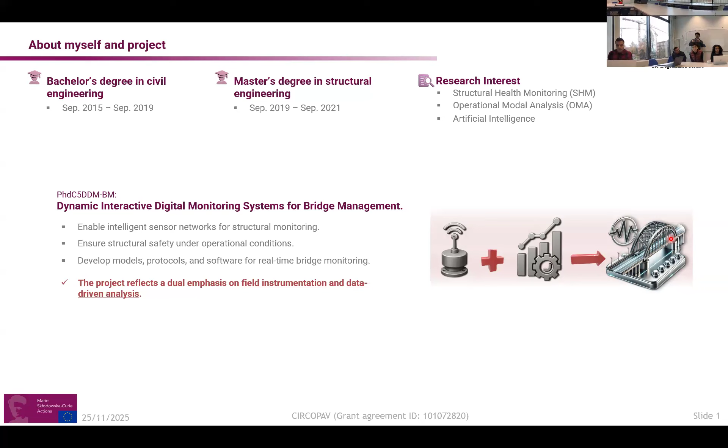Just a quick recap. I'm pretty sure most of you know, but we have two approaches for identification of modal parameters of the structure: EMA, experimental modal analysis, and OMA, operational modal analysis. The main difference is the input excitation to the structure.

For EMA, there is a controlled excitation that we impose on the structure, then we record the responses. But for OMA, we can monitor the structure under actual operation. That's the benefit—for bridge cases, we no longer need to cancel traffic. We can monitor it and assume the input as white noise.

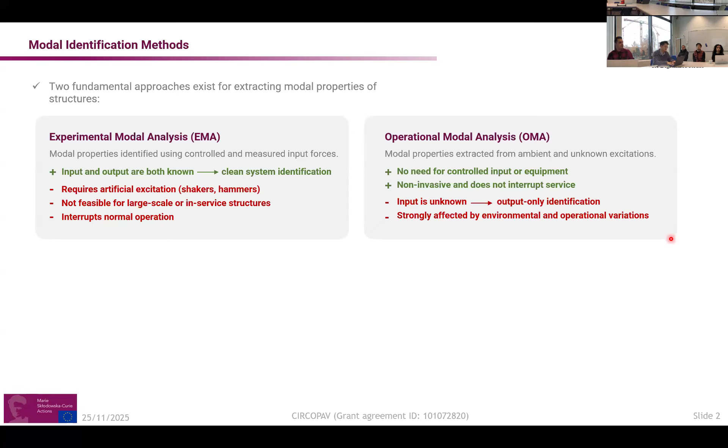We assume the input as random stochastic input forces. We assume three main points in OMA: the input excitation is white noise, the excitation and the structural response are uncorrelated so we can find the relation, and the structure doesn't change much during monitoring.

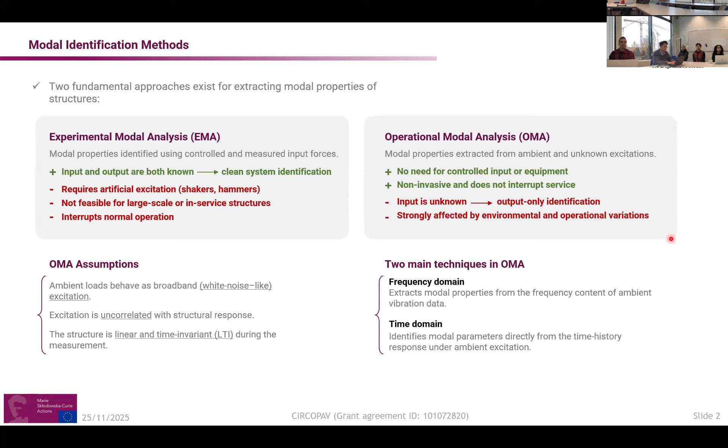There are two main approaches for OMA: frequency domain methodology, which analyzes the frequency content of the structural response, and time domain methodology, which analyzes the response in the time domain.

We have two main types of monitoring: wired and wireless. Each has its own pros and cons, but for our purpose, OMA, it's much better for us to use wireless because they are flexible and easy to install.

In cases where we need roving sensors or different setups, we can easily manage that. But there are some challenges with wireless systems.

One challenge is battery power—the energy source is very important for us. Then data transfer needs to be handled carefully. The third is data synchronization, because we're recording data wirelessly, so we need to be sure, for example, for mode shapes, that synchronization is certain.

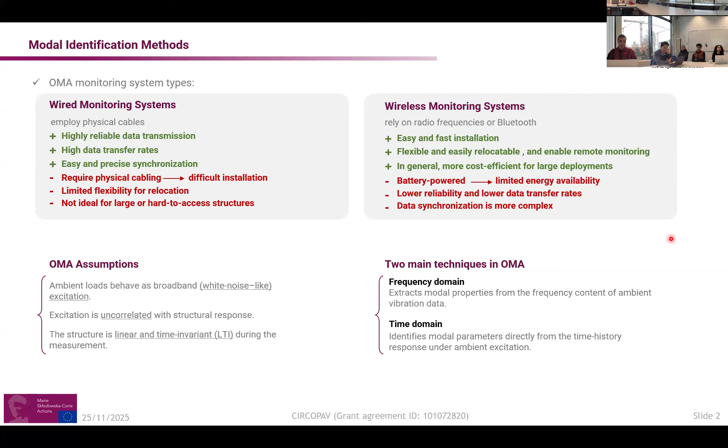Now let's go to the proposed framework. From the beginning of the project, I was cooperating with Fiama, the R&D department of Fiama, a factory located in Parma, Italy.

We have proposed a system consisting of three main components: wireless sensors, a router, and a cloud platform, all connected to each other.

There is a set of configurations that can be set by different users. The cloud is responsible for bridging between the router, which gets the data from the sensors, and sending the data to the users, and also receiving the configuration, which I will get into later. So these are the three main components.

These three pictures are just for the GUI that we have developed. We have developed a graphical user interface, web-based, so that we can connect the sensors with the users.

As you can see here, for example, each of the sensors has their address. This is just an example. We can set the sampling start time, the sampling interval between different recordings, the length of each recording, and the sampling frequency.

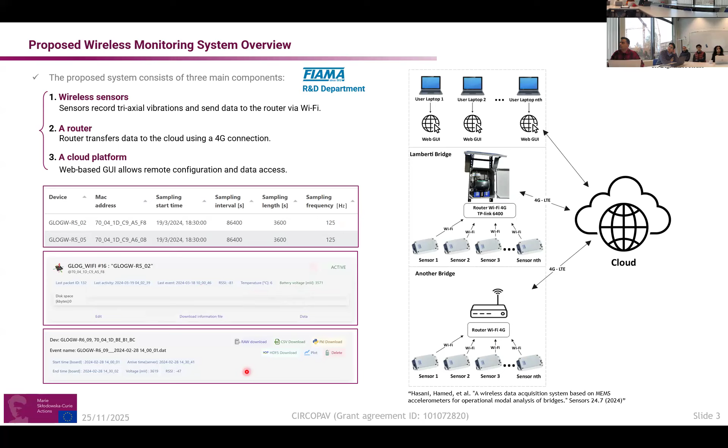The user can download the CSV file and plot them. This makes it very easy for the connection between the users and the sensors for sending configuration and receiving data. The important thing for this setup is we considered it cost-effective and power-efficient.

Now, about being power-efficient - we have an awakening workflow for the sensors, which are mostly in sleep mode unless we trigger them, and then they start recording by the specific configuration we set before. So they're mostly in sleep mode unless we trigger them via the cloud router command by the users, and also by the scheduled start time we specified before.

Then the system initializes - it initializes the sensors, the storage, the power internal module, and then loads the configuration defined for it, followed by synchronization. The timing is now set, data starts being acquired and recorded, then there is upload and finalization, and subsequently it goes back to sleep mode, which saves power.

Let's go specifically to the sensors. We use MEMS accelerometers, ADXL 355, due to its internal ADC converter rather than the 354. We use MEMS because of four important things - first, low power consumption.

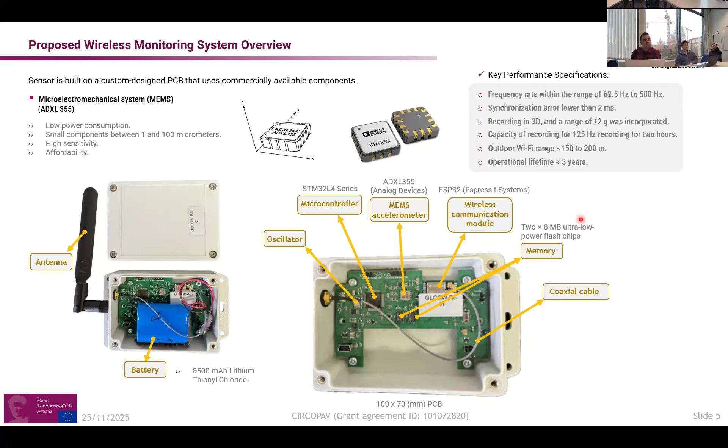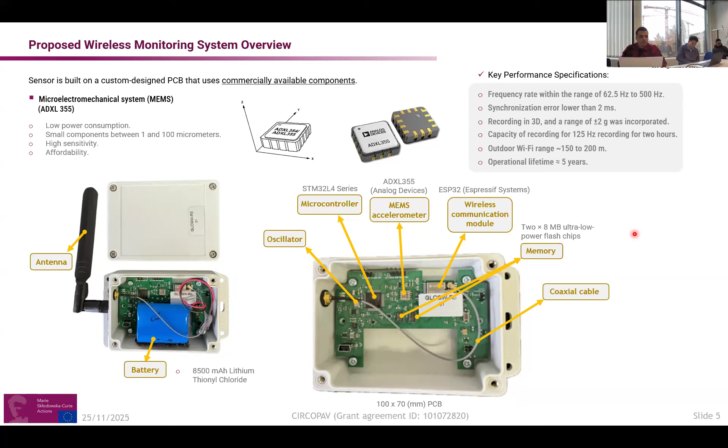Yes, they are in the project actually. So they are the contributors of the project, something like this.

Tests were done under ambient conditions, so no input excitation was actually imposed on the structure. It was just natural excitation.

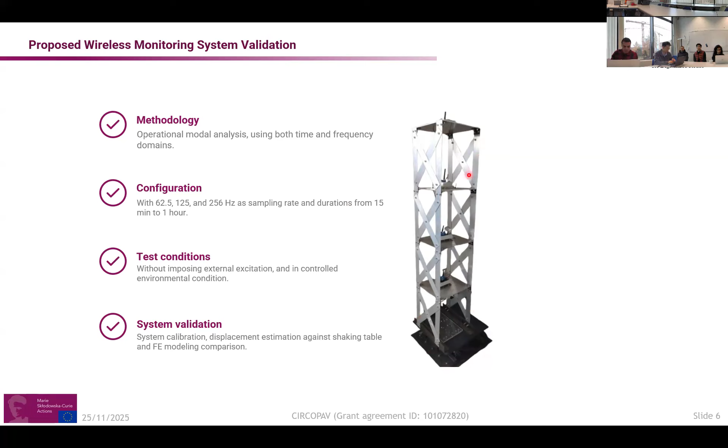We also used the shaking table, which would take too much time to explain, so I'll wrap it up quickly. This shaking table was used for validation of the precision of the sensors, and then we validated via the FE models also.

Now I'll show you the result of OMA. As you can see, we mounted one sensor in the middle of each of the floors, and with natural excitation, these are the results.

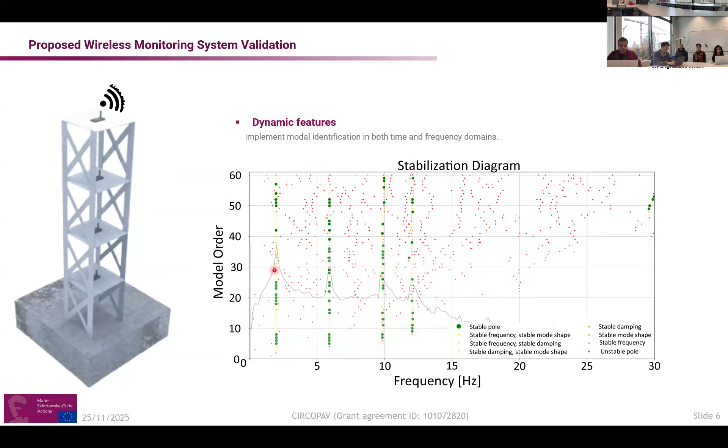As you can see, there's a combination of a stabilization diagram estimated via the time domain method, stochastic subspace identification, and also the PSD of the frequency domain decomposition.

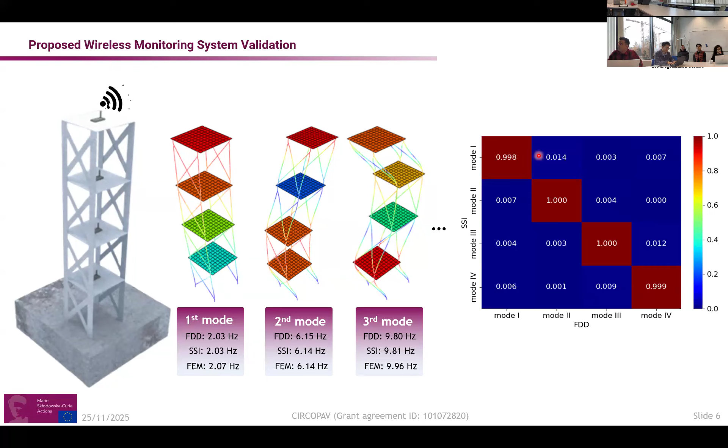We estimated the natural frequencies and validated the mode shapes with the FEM models. On the right side you can see the modal assurance criterion, a matrix showing the similarity between time and frequency domain. On the diagonal, values are close to each other, meaning there is cross-validation between the time and frequency domain methods.

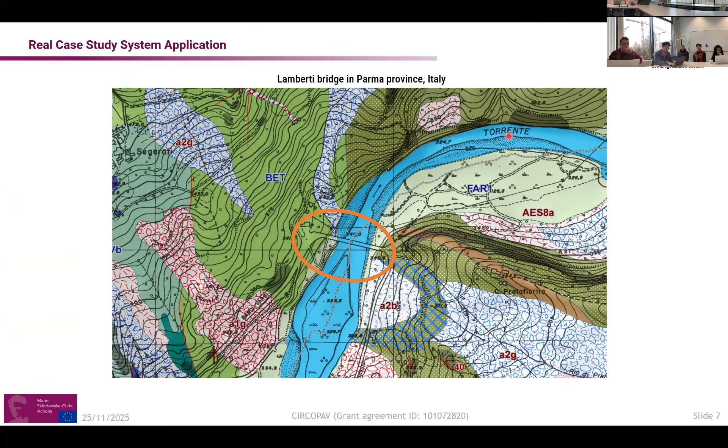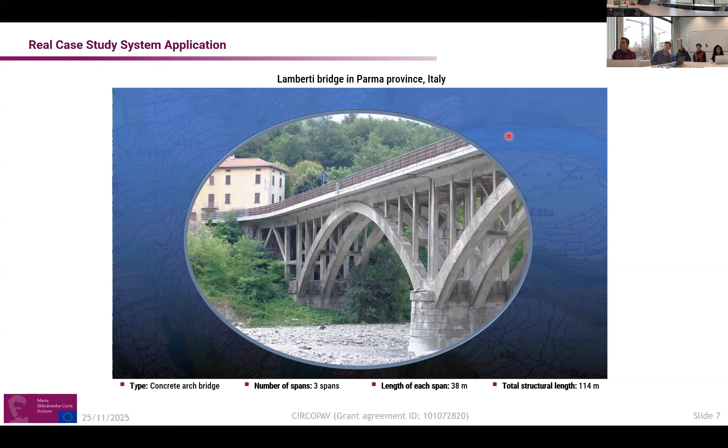Then we implemented this sensing system into a real case scenario: a bridge in Parma province named Lamberti. This bridge is a concrete arch bridge built in 1933, with 3 spans, each 38 meters long, for a total length of 114 meters.

We used a single setup because we wanted to be sure about synchronization first, so we used 30 sensors at the same time on this bridge. There are 2 joints here where we placed sets of sensors, and the rest are spaced 9.5 meters apart.

We used a recording duration of 1 hour. The sampling rate was tested with 125 hertz and 62.5, and we used a solar panel as a battery source for the router.

So this is X, Y, and Z, which was important for the mode shape. These are the pictures showing the sensors mounted on two sides of the bridge.

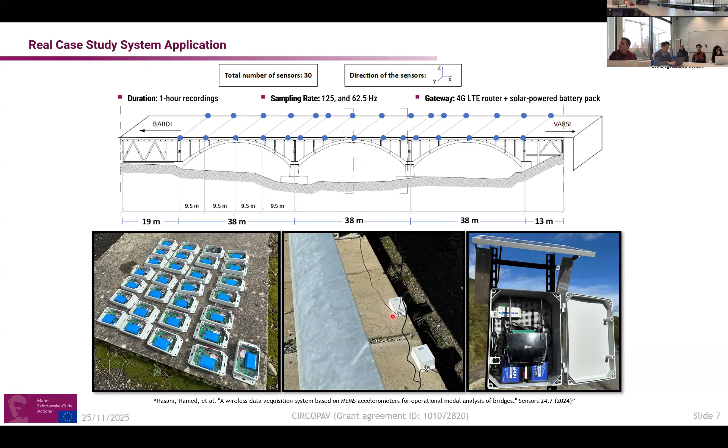Here you can see the results of SSI covariance-based and, I think, enhanced frequency domain decomposition. And these are the modal properties, the results of the modal parameters of the structure.

This is the first mode with three methods: time, frequency, and frequency domain, then the second through seventh mode shapes. The intention was to validate the proposed monitoring system with the real case, and this is the MAC for the 7 modes for time and frequency domain.

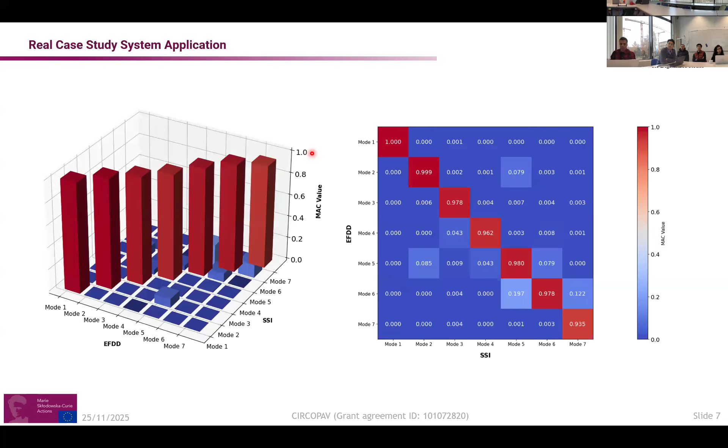From here, I want to explain the proposed framework that we have developed. We had 4 motivations for this, so 4 challenges to address.

First, after extraction of modal parameters from the structures, we consider any deviation from the healthy baseline as damage. But the problem is that external environmental and operational factors affect these modal parameters, sometimes intensely, and we cannot misunderstand this as damage. According to Professor Brincker's book, there is 5% daily variation and 10% seasonal variation in modal parameters.

So this was the first concern, that this framework should address. The second was that SHM is an interdependent task, so each module we define for the framework should be connected to each other and have a follow-up progression. This was the goal, so we shouldn't treat modal identification in isolation—we need to connect modal identification to damage detection.

The third was to condition for environmental factors using AI, implementing machine learning models. The fourth was to make this an automated process, so it's easier to implement for people with the least knowledge of SHM, and also much faster, serving as the base for real-time monitoring later.

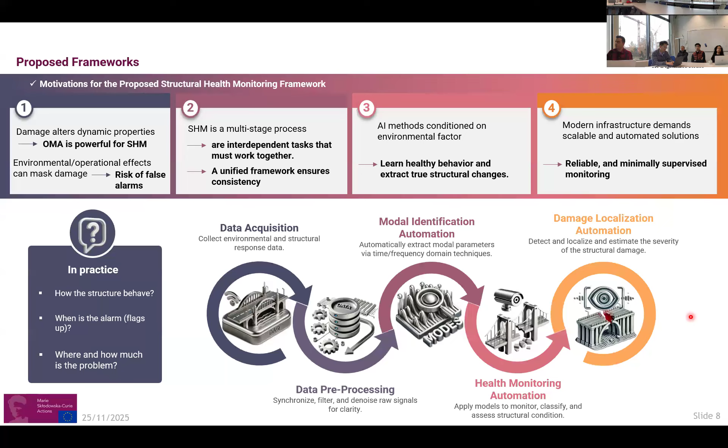So we have 5 actually consecutive most important steps: data acquisition, data pre-processing, modal identification, health monitoring automation, and damage localization. We try to automate this process in 3 modules that I will explain later, and we're going to integrate that.

So let's go first for modal identification, which is also embedded with this data pre-processing. What we did is we used SSI covariance space.

As I said, it's a methodology in time domain. As you know, the result of SSI is the stabilization diagram, right? And then it creates some poles, each of them encapsulating the dynamic behavior of the structure. If through the order of the stabilization diagram any pole is repeated constantly, in a constant manner, we consider that as a stable pole of the structure.

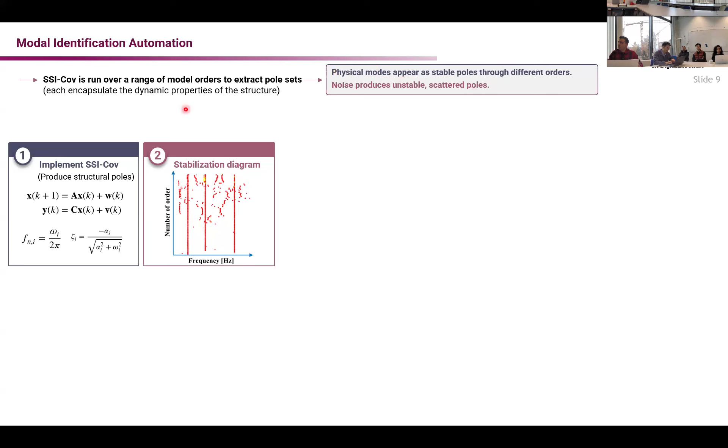But the goal for us was to automate this process. So the result of SSI is a set of physical modes which appear constantly, and noise produces unstable poles. After that, what we did was we needed to define a band search for each natural frequency, to search for that band automatically.

So there are 2 things to consider. First, we need a search band, and then we need a search tool. For the search band, what we did was define an adaptive frequency band, which first, before doing anything, estimates the approximate position we expect from the location of natural frequencies through FEM models.

Then what we did was expand this band with the perturbation progressively from 5% to 50%. So we search for the position of a stable pole starting from 5% to 50%, dynamically, and the first perturbation where the model is successful to find a stable pole, it stops.

Why are we doing this? Because through environmental factors, the position of natural frequency changes, or if we have damages. So we have to be sure that we cover them. And on the other side, we have to be sure that sometimes the modes of the structure are closely spaced, so they're very close to each other.

But can I ask you, in real objects we hardly ever have a really reliable finite element model, and oftentimes the real frequencies are not very close. Do you need this as a step to start from that? We need an approximation at least, because we need to define a frequency band.

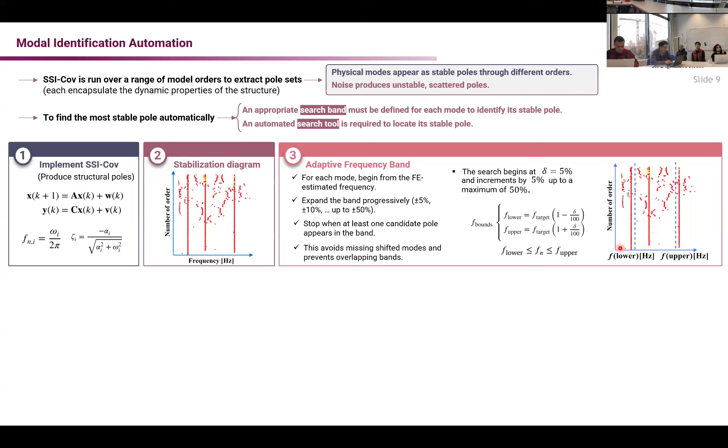With this searching band, we need to actually find. So the moment it finds the first pole, it stops, and it does this for all of the modes.

For this search tool, we first estimate the stability score for each group of poles. First we round them, then we divide the number of stable occurrences over the number of orders to find which of them is stable, and then we actually use Gaussian mixture models by defining two, like k equal 2, which is like two Gaussian distributions.

We'll find the stable pole here. So we choose two of them, and the one with the high mean, we consider that as the stable cluster, and then the highest score inside that shows the stable pole.

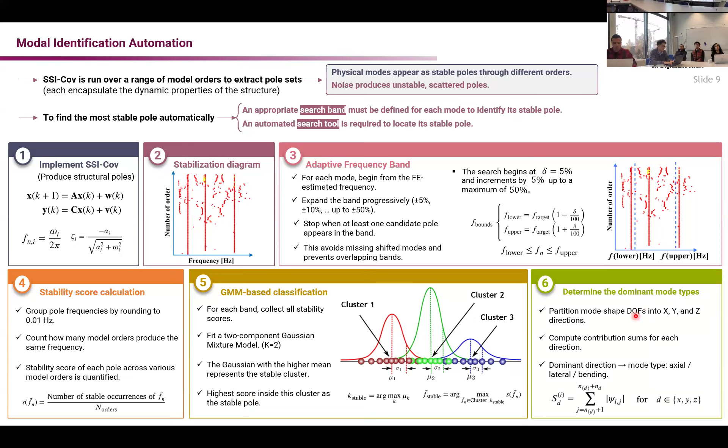We determine the dominant mode shape, because each mode also encapsulates, if we record in 3D, three types of eigenvalues. We estimate the contribution of those three to see which one is dominant, so we call them the modes: bending, axial, or lateral, something like this.

This is the GUI we practically use to implement this methodology. The user can browse the data received from the CSV file from our system, and then specifically choose the maximum order and the block rows, and the specific filtering desired, and detrending. It finds the mode shapes and also chooses the dominant mode type and all the natural frequencies under types. Here you can also see the stable pole estimation that shows with search within a perturbation.

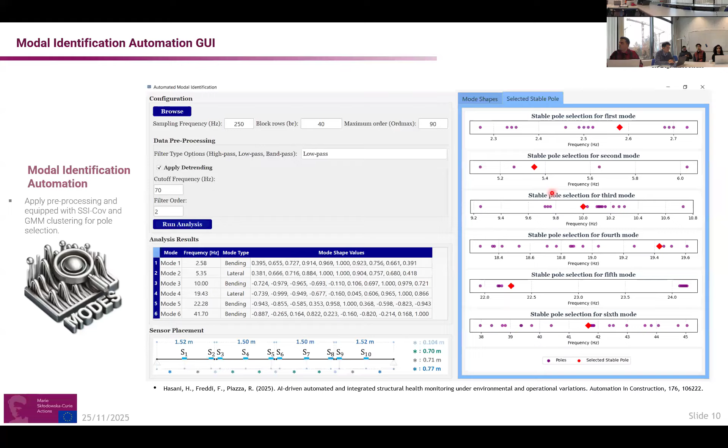For the next one, for the existence of damage, as I mentioned, temperature, humidity, and operational loads can mask the damage. Natural frequencies are a good tool here to determine if there is something happening inside the structure or not.

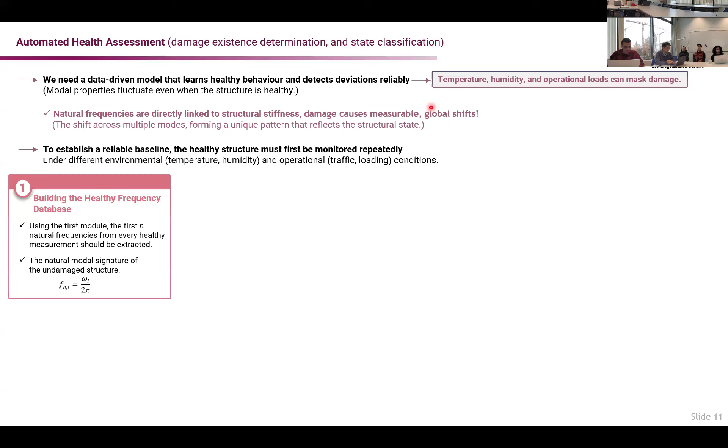We need to establish a baseline for the healthy behavior of the structure, and for this healthy baseline we need a set of healthy measurements from the structure under different variations of external effects. Then we pass them through the first module and calculate the natural frequency for the healthy structure, which of course vary due to the external effects.

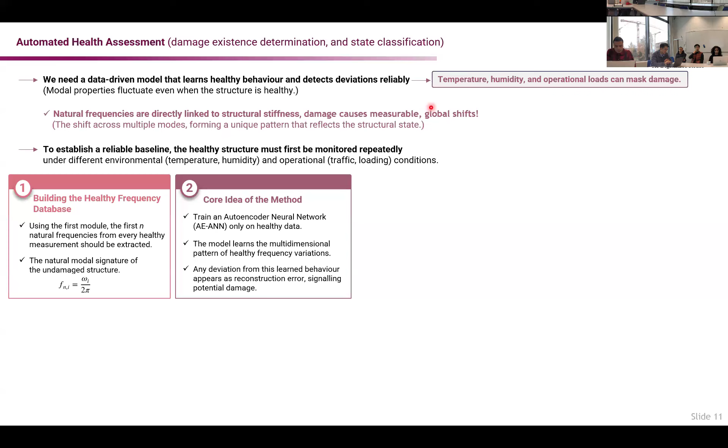What we do is develop an autoencoder ANN trained on the healthy natural frequencies to reconstruct them. Of course they vary, but the reconstruction error matters to us, so we can define a damage index as the global reconstruction error for these natural frequencies in the end.

We can classify the health of the structure into four different states, as we have healthy. I also have to mention that we employed progressive thresholding for the reconstruction error, where in the beginning we consider the 90th percentile of the healthy MAE or MAPE, whatever reconstruction error, as the healthy threshold, and then we define further.

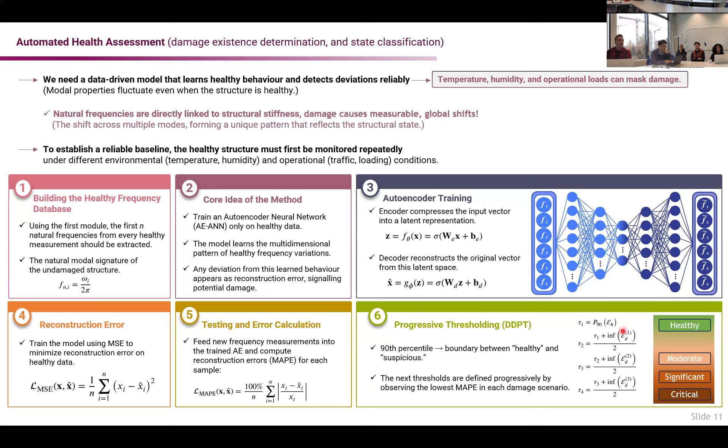We then find the average of that with the least reconstruction error for the damage scenarios to find a threshold for damages. This is the implementation of that: you can put the first six natural frequencies, and then you see the reconstruction error. Based on that it will say if the structure seems to be healthy, or it can classify the health of the structure.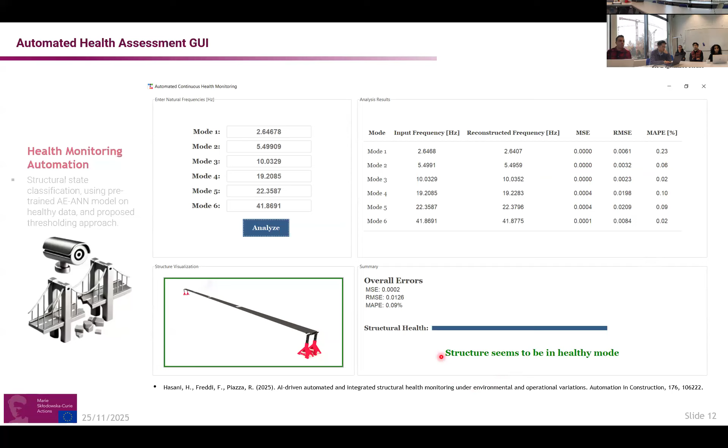The third one is localization and severity estimation. As you know, mode shapes and modal curvature, their second derivative, are extremely sensitive to noise and also require dense deployment of a sensing system.

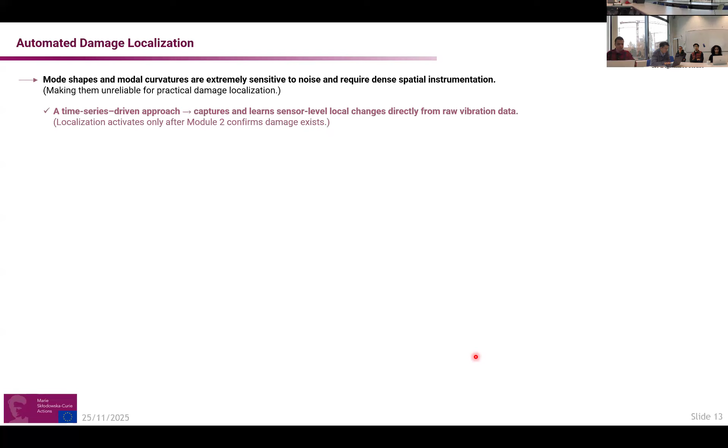So we use a time series data-driven approach here to capture the behavior of the sensors through progressions. What we did was first record the healthy acceleration data through different data acquisition series under different environmental and operational conditions.

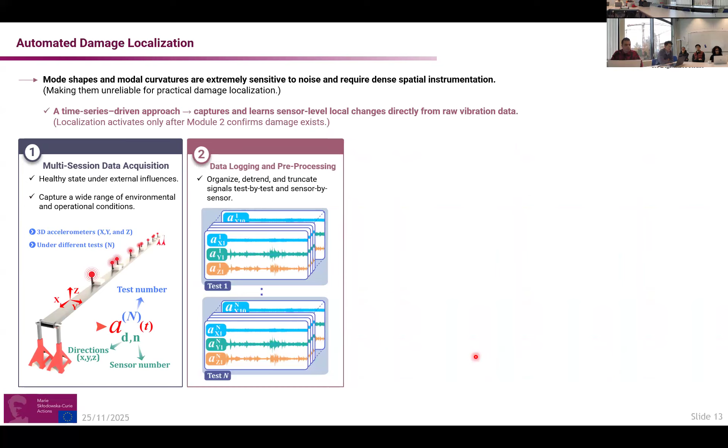Then we applied pre-processing: we did data logging, truncation to ensure the same length, and then applied the discrete wavelet transform to decompose each signal into detail and approximation coefficients.

Approximation coefficients isolate the content of the signal in low frequency, and detail in high frequency. So after a set of level decomposition, if you consider the approximation coefficient of the last layer, we can consider that as the trend of the structure, the pure dynamic behavior in low frequencies. Any variation here is obvious, and it also reduces the noise in this case.

Then we extract and store the approximation coefficients for each sensor through the data sets. In this case, if we train a model on this, we will have a spatio-temporal signature of the healthy base structure.

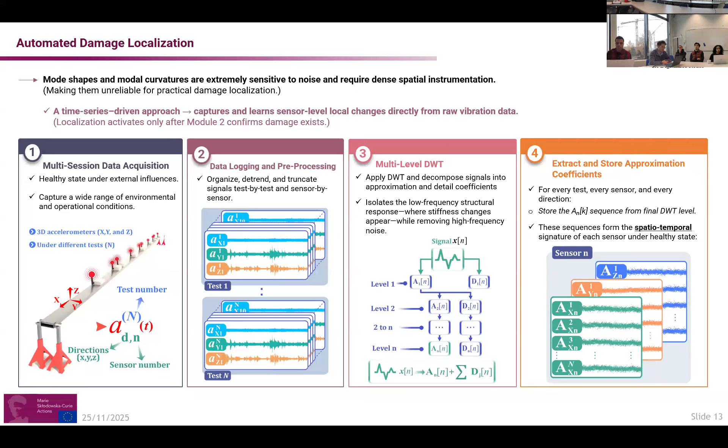For this purpose, before training, we applied window averaging of the approximation coefficients, for two reasons. First, we want to remove outliers, some weird outliers if we have, for noise reduction. And we need to reduce the dimension for the upcoming AI modeling.

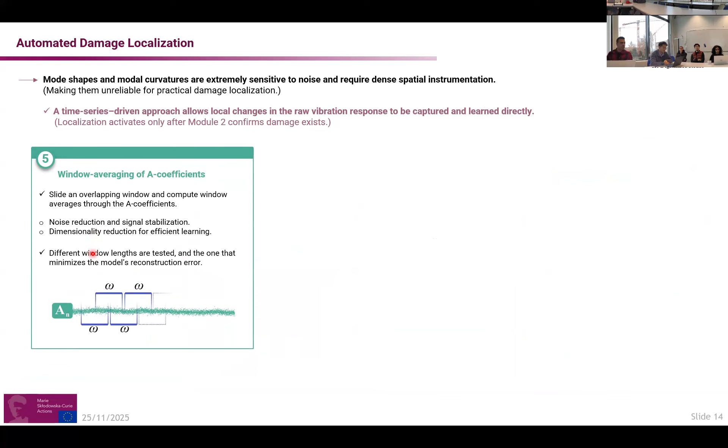Afterward, there's also optimization for this window. We reconstruct the AI model, and whatever gives the least error, we choose that as the best window.

We developed and assembled three input matrices. For the behavior of the structure, we have a 3D matrix for the X direction, Y direction, and Z direction, and each of them looks like this: the rows are the test sessions, the columns are the time series, and the third dimension is the number of sensors, the feature.

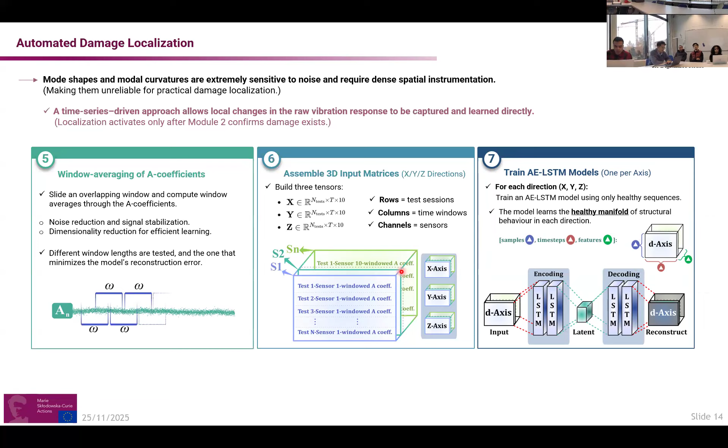We then developed AE-LSTM, autoencoder long short-term memory models, one per axis. So in the end, we have three models. We have samples, time step, and features, and the reconstruction shows the discrepancy of each sensor's behavior.

It's important to say that this module is only activated when we are sure there is damage, right? After module 2 verifies that there is damage.

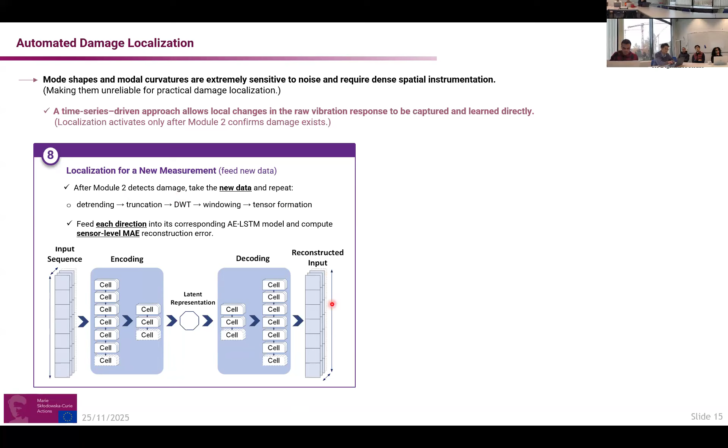For any new data, we do the same processing: we apply detrending, truncation, DWT, windowing, and tensor formation. We construct the reconstruction, and we estimate the reconstruction errors.

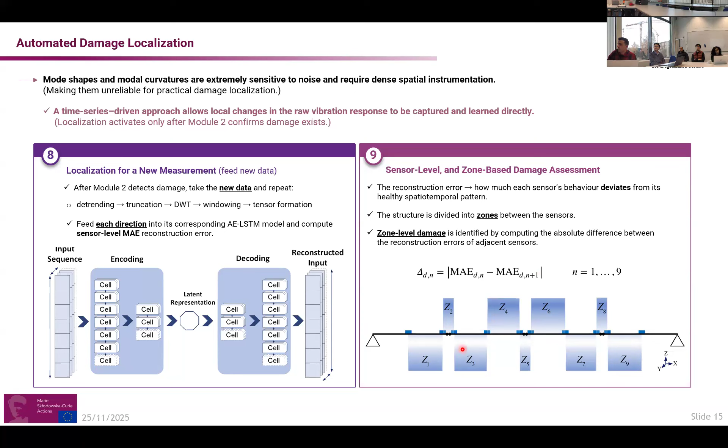In a scenario I'll explain later, if we have a set of sensors on a simple beam or a bridge, we consider zones between each adjacent sensor pair as the discrepancy — the subtraction of the absolute reconstruction error between two adjacent sensors. This is done by calculating the reconstruction error and subtracting it between two adjacent sensors.

This is if you want to implement it in a GUI, but I'll explain the validation on the laboratory structure later. Here you just browse your X, Y, and Z datasets, CSV files, and it automatically calculates the damage localization. As you can see, it shows all three directions, and you can also see it in another plot.

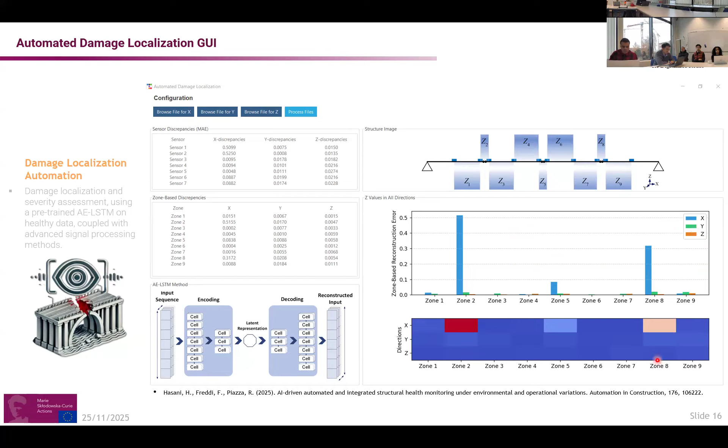For the validation, we needed to replicate the real behavior of bridge cases. What we did was consider a laboratory structure with interconnected steel box beams. The structure features three joints to replicate the real bridge, and it is secured.

Each of these joints is secured with two plates, as you can see here, and each has 8 bolts, so in total 16 bolts for each connection. We did this because we can easily reduce the torque values for damage simulation. It is equipped with 10 three-dimensional sensors.

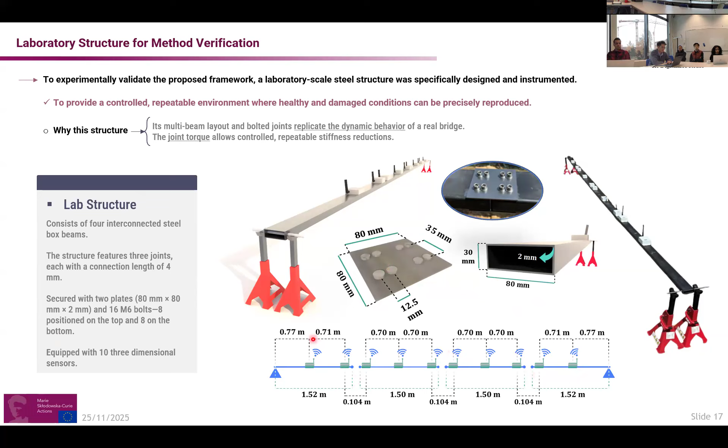The recording is done without input excitation by us. This is because the bridge was positioned outside the factory, so there were cars passing by on the street, giving us vehicle vibrations, plus some nearby factory machinery. But we were careful not to create repetitive inputs, which is not good for OMA, and we also had other natural environmental effects like wind.

We recorded the data every 2 hours for 30 minutes, with 250 different tests repeated, each at 250 hertz. We chose that because the maximum desired natural frequency was located around 42 hertz, so with the Nyquist frequency we were sure to cover what we wanted.

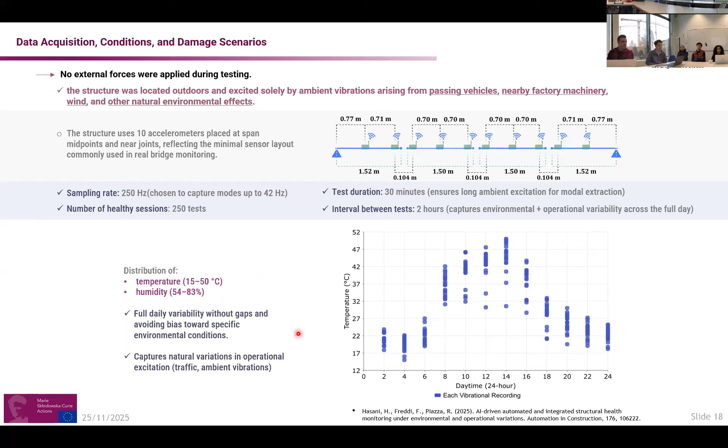The temperature during recording varied between 15 to 50 degrees, and the humidity varied between 54 to 83. So we covered different operational and environmental effects, and we were curious to find the correlation between them and how they affect the natural behavior of a healthy structure.

We also applied 3 damage scenarios. In the first, we applied a 45% reduction to the torque values of the left connection. For the second, we applied it on both sides, with the right one at 30%. In the third damage scenario, we applied damage at 3 points of the structure, including 10% reduction in the middle.

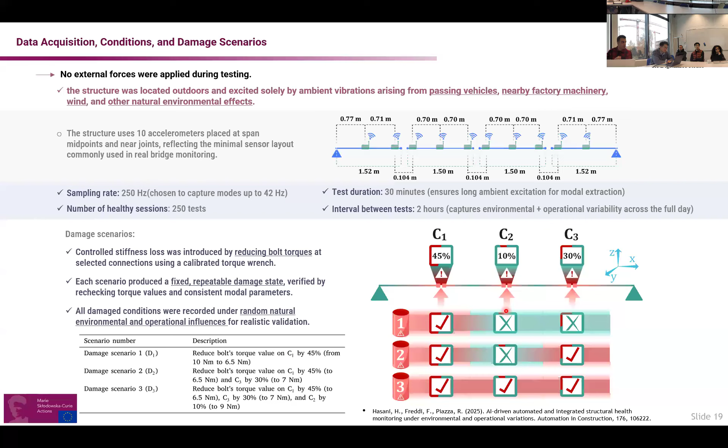We tried to have a fixed and repeatable damage state, so after each reduction we made sure the total behavior of the structure didn't go in a strange way. We also controlled other connections, and the damage scenarios were completely randomized relative to natural, environmental, and operational factors.

These are the estimated natural frequencies through the first module I mentioned. Across 250 different tests, these are the first 6 natural frequencies of the structure, along with the mean, max, and variation. The frequency variation across tests was around 3 to 5%, as expected, with modes 4 and 6 showing a slightly larger spread, specifically mode 4.

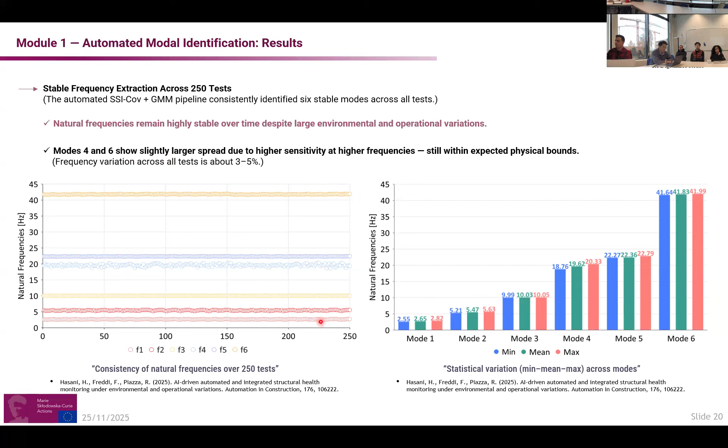And this is the result of the second module. We trained the AE model on the healthy natural frequencies, and this is also the actual estimation of the thresholding, which I mentioned earlier.

These are the health classification of the 3 damage scenarios. This is the first damage scenario. As you can see, for each of the 6 modes, we have estimated the mode type, the natural frequency, and the reconstructed error, and then the overall estimation of the classification.

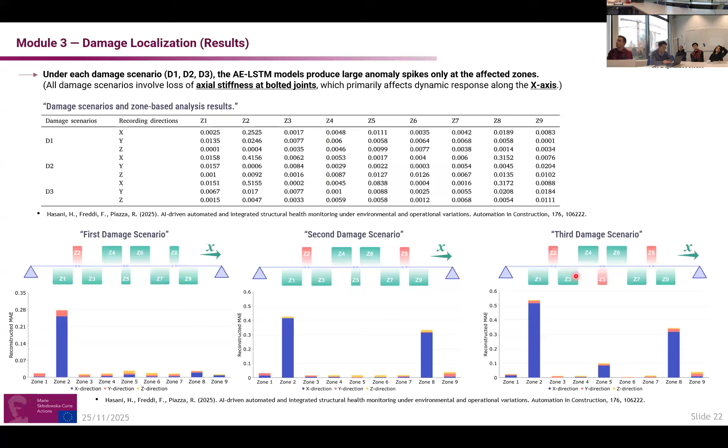This is the localization for the 3 scenarios. The first, as I mentioned, was just on the left on Z2, which was the connection between sensor number 2 and sensor number 3. This is the cumulative bar chart for the localization of the damage. As you can see, for all 3, it was successful to find and localize the damage.

But there were key areas that we intended to develop from the current framework. First, we had a time domain methodology. We tried to incorporate and couple that with the frequency domain. So in this case, we estimate the modal behavior of the structure in two different ways - one is time, one is frequency. They're not different, but in the end you can do cross validation between them.

And third, we chose and relied just on modal certainty - we said that if modal parameters, natural frequency, varied, there is damage. But here, beside the modal parameter changes, we verified with a second verification in time series, which I'll explain later.

Also, this time we used 500 different tests, so we doubled the tests. This is the total framework, as I mentioned, so again we have 3 modules but with different specifications.

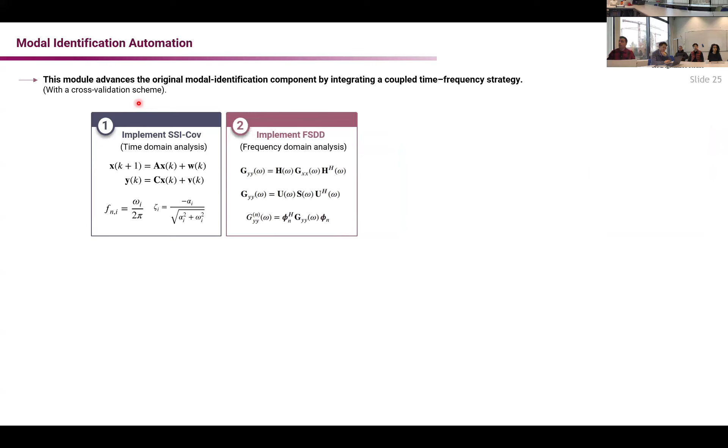For the first one, as I mentioned before, we calculate SSI - we apply SSI and calculate some poles. This time, we also implement FSDD, which is the frequency spatial domain decomposition, in the frequency domain.

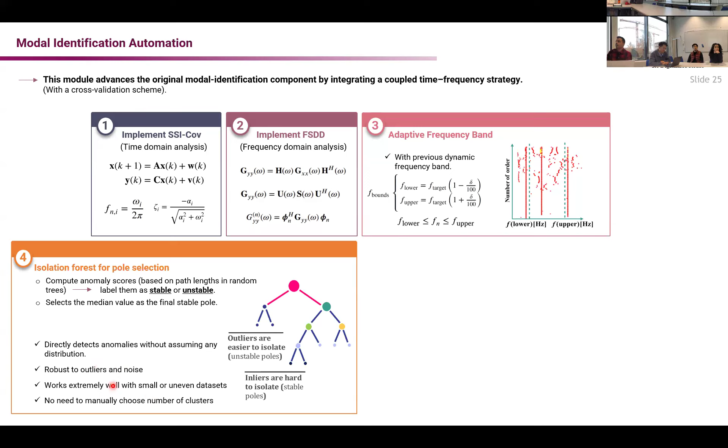For the SSI, like the previous method, we have an adaptive frequency band, but this time we apply isolation forest to choose the most stable pole. Isolation forest is much better than GMM in my eyes due to some differences - they directly detect anomalies without assuming any distribution this time, whereas previously we had that assumption. It's also much more robust to outliers and works better with low data.

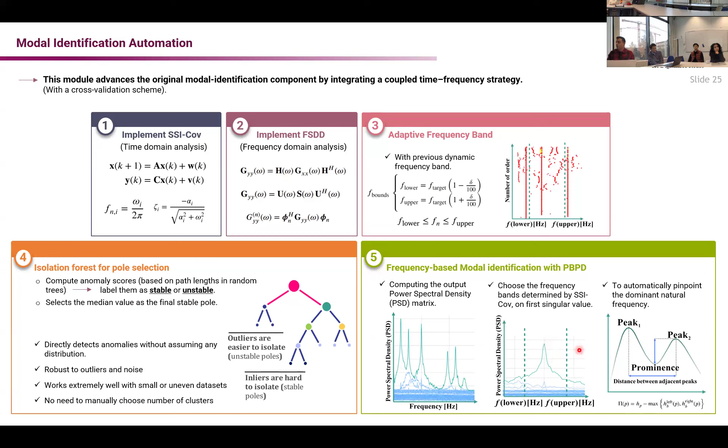After determining the most stable pole and the successful band, we calculated the PSD in this frequency domain. We automatically considered that successful band for choosing the stable pole, the peak of the PSD. How we did this: we used prominence-based peak detection to automatically choose the peak of the frequency domain.

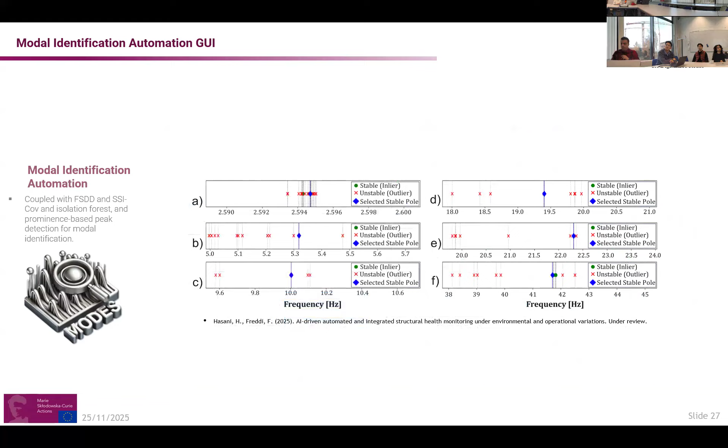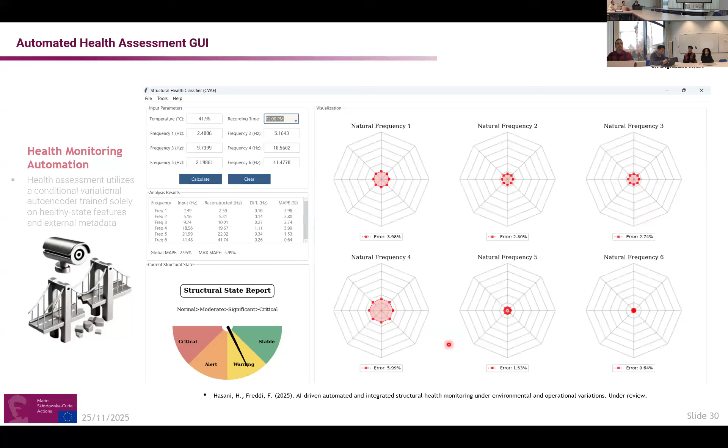As you can see here, this GUI allows you to put natural frequency from first to sixth, and also put the temperature here, and also the time of the recording. So it automatically incorporates this external effect into your results. Why does it matter? Because afterward you can also add humidity, or other external features which have their own effect on the results.

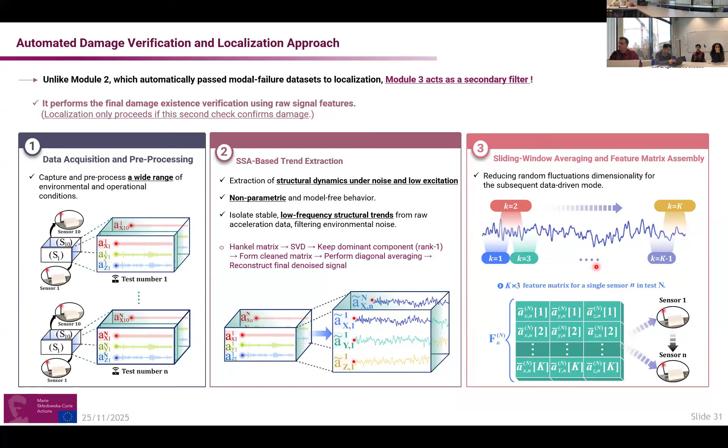Afterward, we again apply a sliding windowing technique to reduce the number of data points and reduce outliers. Then we reconstruct a matrix, ten matrices for ten sensors. Each sensor has its own set of values - this is X, this is Y, and this is Z, so in three directions it encapsulates.

Then we train ten different one-class support vector machines, one for each of the sensors. We consider each windowed average value of the sensor as a point in three-dimensional space. In the end, if we apply a one-class SVM for new data, we can repeat the same thing and see if it is an outlier or not, if it is outside of this healthy border. So we have a second verification of damage besides the natural frequencies.

After we are sure that this is damage, we plot it in 3D and calculate the closest distance, the average closest distance of the points of the healthy and damage sets, and that shows the discrepancy of each sensor. In the end, you can calculate the discrepancy of two adjacent sensors and find the zone-based damage.

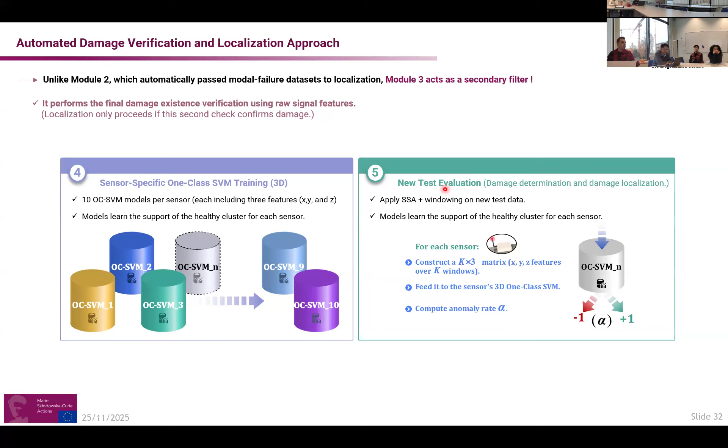This is more obvious if I show it here. Imagine that in the second module we misunderstood the condition as damage - we said this is damage, but it's not. Sometimes this happens because natural frequency is not very solid for finding very minor damages. Here it shows that no, this is healthy, and it shows the cluster of healthy like this.

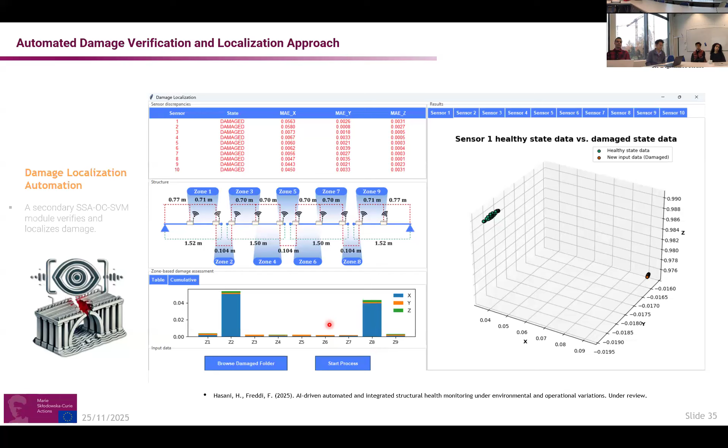But if it finds an outlier here, it shows something like this. So it will plot your healthy points versus the damage, and find the distance for each sensor. You can set it for all ten sensors, and then it plots an accumulative bar here for localization, which lets you precisely localize all three damage scenarios that we have.

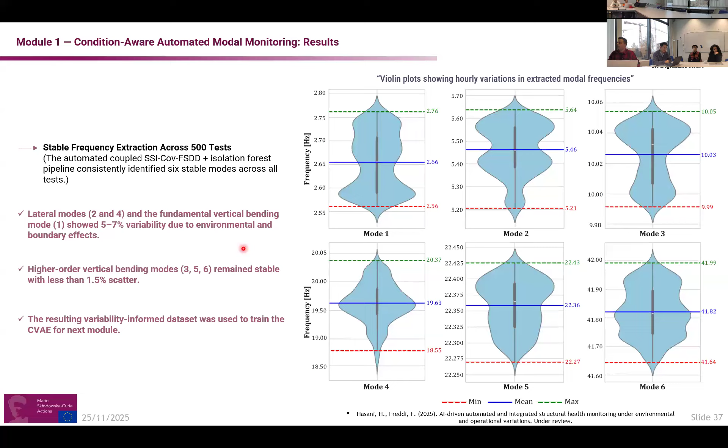For testing this module, we recorded 500 different tests, just like the previous setup. These are the natural frequencies estimated for the 500 different tests. This was a violin plot of that, so you can see the mean and max and where the natural frequencies are more concentrated. This is the result for the health classification of the natural frequencies.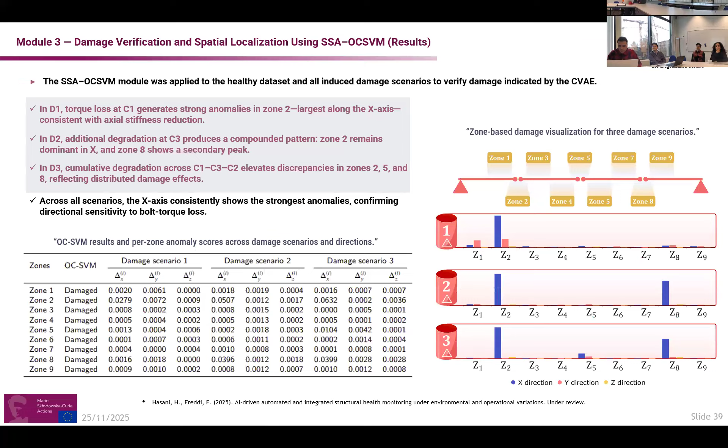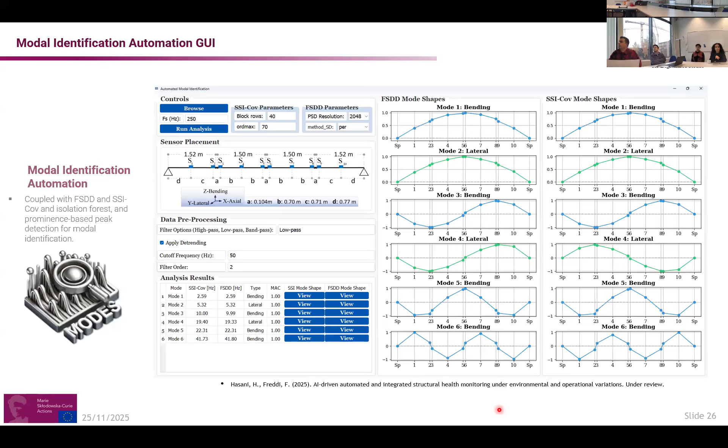I think it was maybe slide 29. Yes, exactly. It was when you mentioned recording the temperature at a certain time. This is 28. No, this is 26. Okay, sorry, 20. I just wanted to have it so that... yeah exactly, okay.

Yes, I will explain. Previously, on the simple autoencoder, we implicitly encode the behavior, so we never say that this temperature with this hour of recording produced this reconstruction error. But this time, inside the model, it explicitly incorporates the effect of temperature. So for the model, it now matters when the recording is taken. Physically speaking, there are relations which we never actually know. There's a distribution, because for a variational autoencoder there is no fixed latent value, it is a distribution inside. So now it matters like this.

Okay, so it's that, maybe I said it wrong. Maybe I confused you. Yeah.

On this one, because you're looking at up to 6 modes, the first 6 natural frequencies, did you do any sort of architecture testing? Because if you go up to a lot more frequencies, the relative dimensionality of your frequencies compared to your heterogeneous or exogenous variables, the ratio will get a lot larger. Do you know if that will be a problem at all?